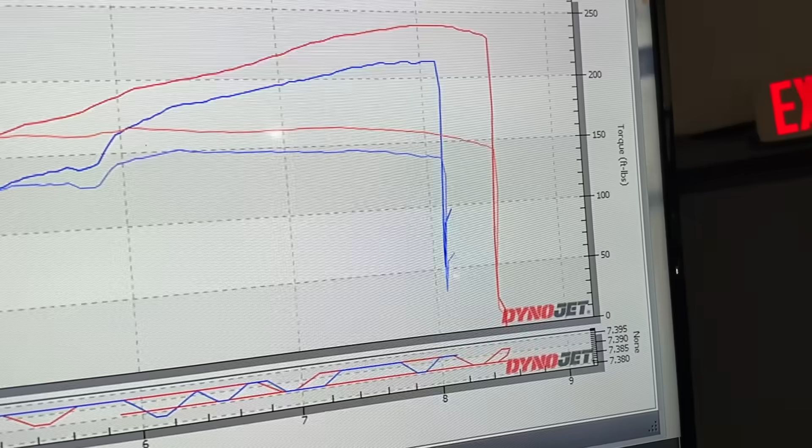My car has the NA package. I'm going to call it an OEM Plus enhancement package. This S2000 is a 2004. It's 100% stock except wheels and suspension. We're going to show you a full before and after and details of what this NA package is all about.

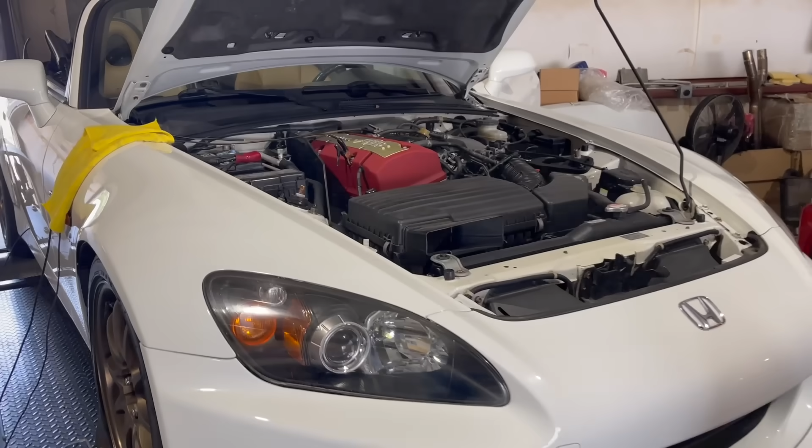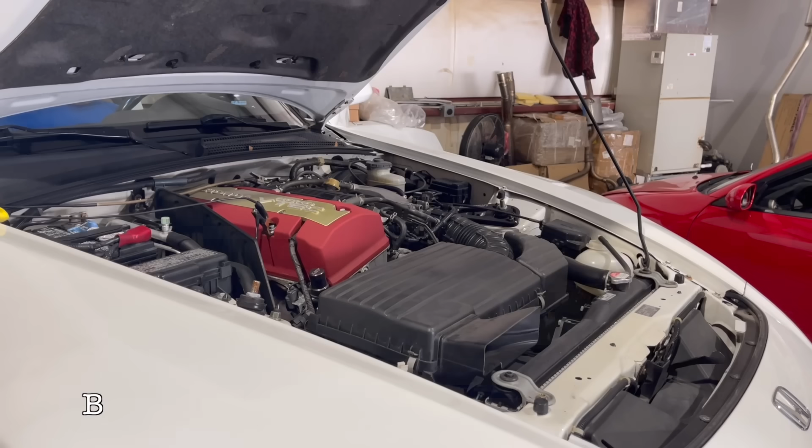All right, we have Jeff's car on the dyno. It's idling, trying to make sure it's up to operating temperature. Alright, so the car is pretty darn consistent. It's 211, basically 150 on every run.

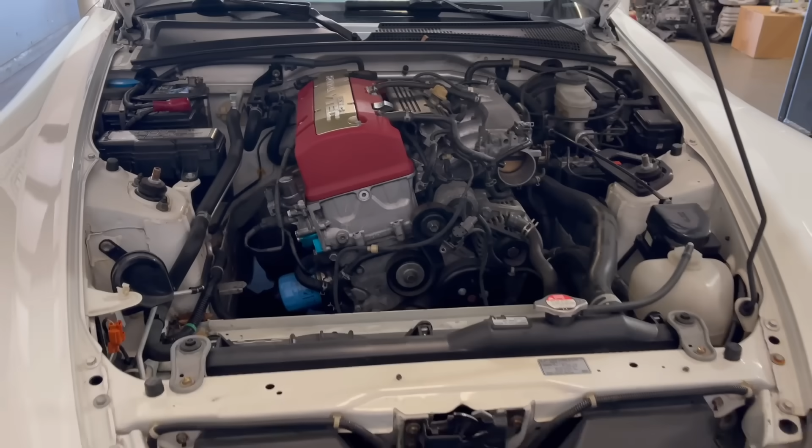Got the car in the shop. I've done a little bit of work off camera here, which is just removing the airbox. I've got the bolts off of the factory header and the heat shields removed, so I'll be ready to go up in the air and take that out. I got the airbox out, so we're going to do a modification to the airbox.

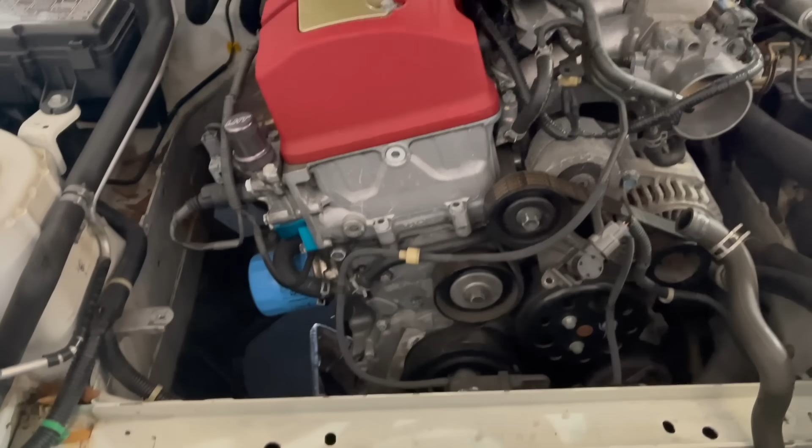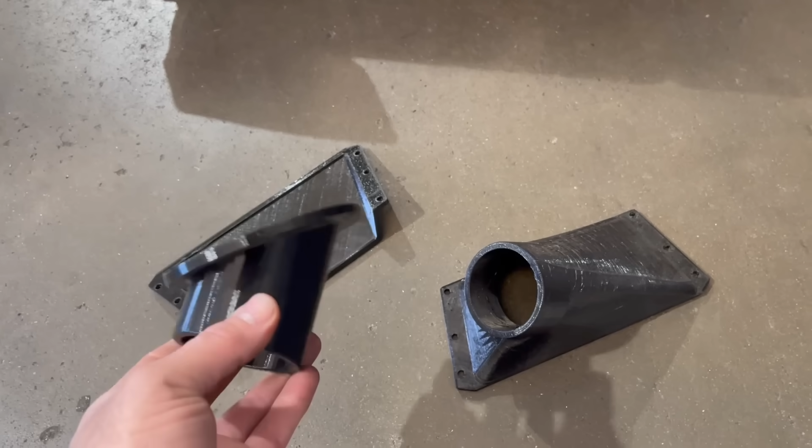And you know, we've done the airbox mod in the past where we just take the divider out, put a K&N filter in it. We're going to take the airbox, we're going to add a little something extra to it now. So here are the parts we're going to add to the airbox. This here is a port that's going to bring air into the airbox. It has an angle on it to point it straight down because the front of the airbox has an angle to it. This is the top half of a scoop that's going to basically connect this to there, and then this goes under the car. Now we put it on this side over here to keep water and debris from getting directly on the filter.

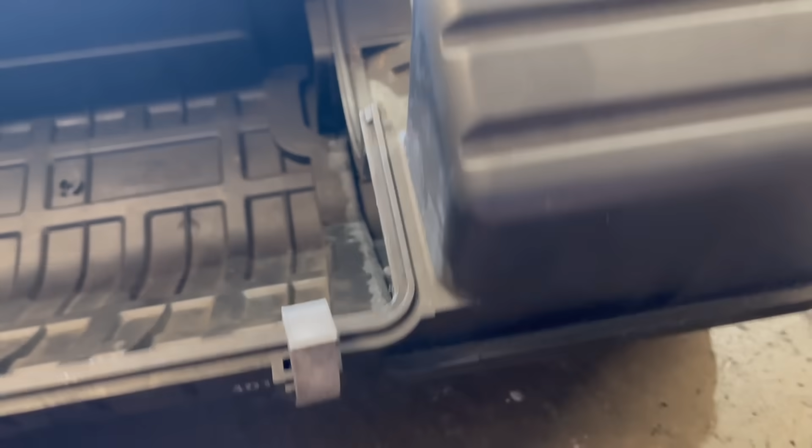All right, so that airbox is now all opened up. I've got that area opened up as well for the scoop. And then I used some nut certs in the plastic there. And we'll Loctite the bolts. They don't need to be tight, they just need to hold it in place. So that will hold it very sufficiently. But that whole area is opened up, so now when you bolt that on there, it's gonna blow air into here.

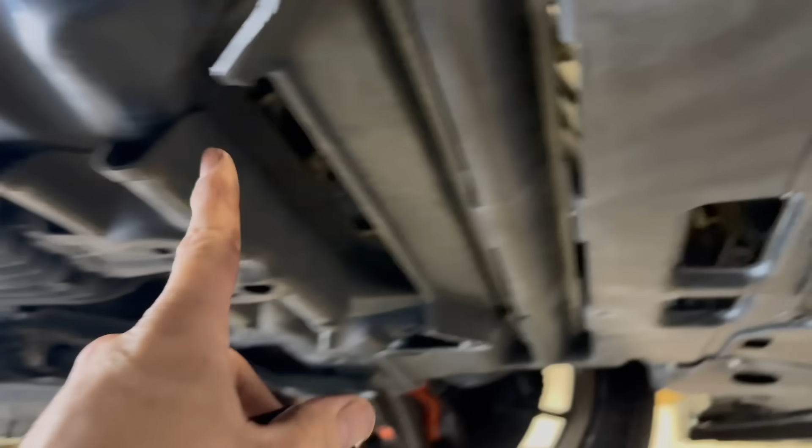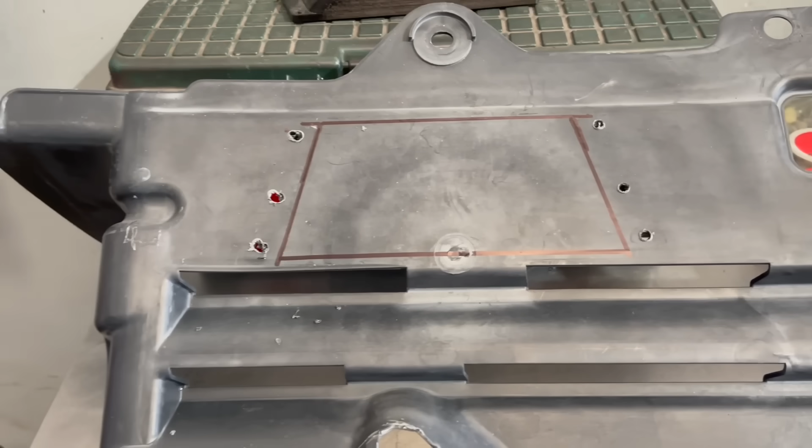All right, with the car on the lift, you have this plastic piece here. Basically the radiator is here and the subframe is back here. I'm a little too close. So the piece of plastic goes in between the two. You get this large flat area here. We've got our scoop, and we're gonna mark out where it goes about in this area. And we got that. So we gotta take that with the marker and cut it out.

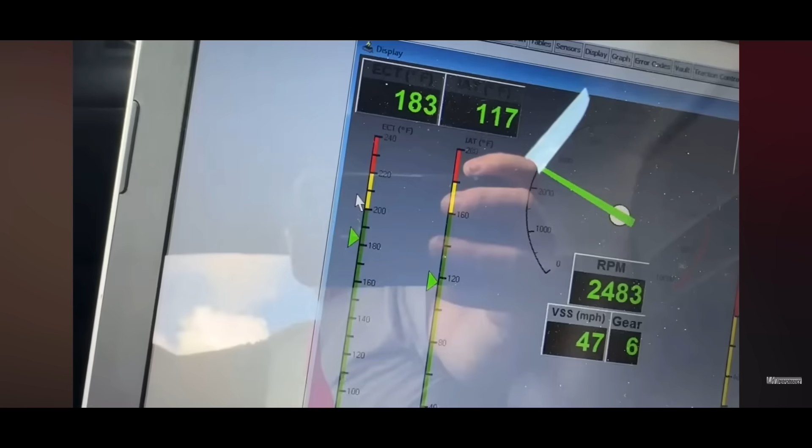I've tested this intake on my car for a little over a year now, and it's real world testing. I've seen intake temps of 117. I've done 2 back-to-back runs on this road just in case there is a headwind and it's changing. It's dropping already. It's at 111. Right now 104 is what we're looking at. This is at the end of this first run. I'm going to turn around and go the opposite way now.

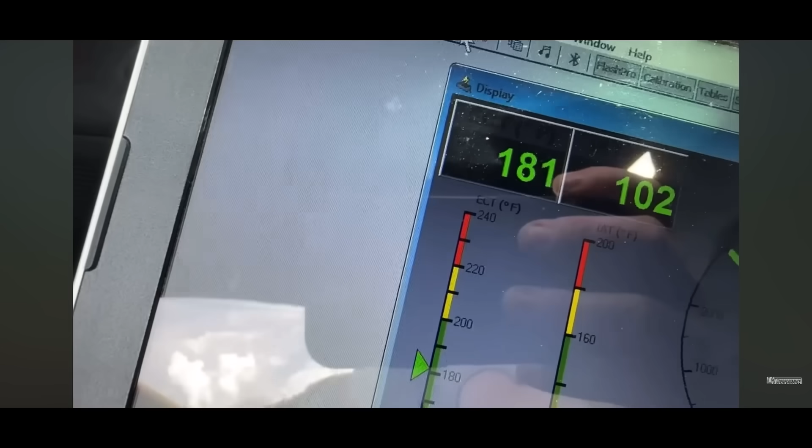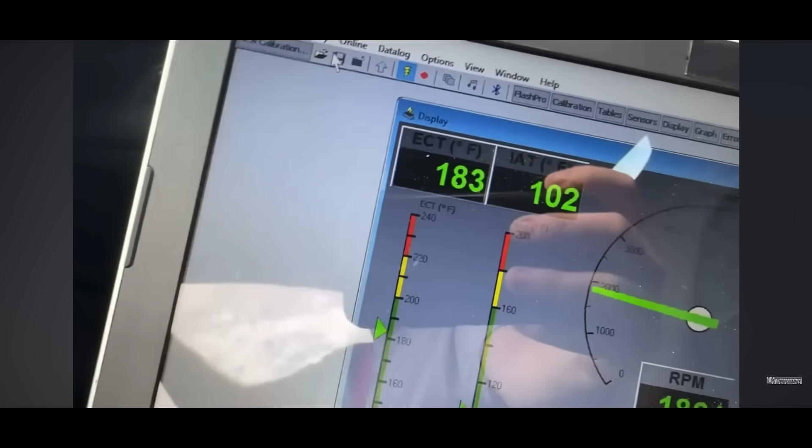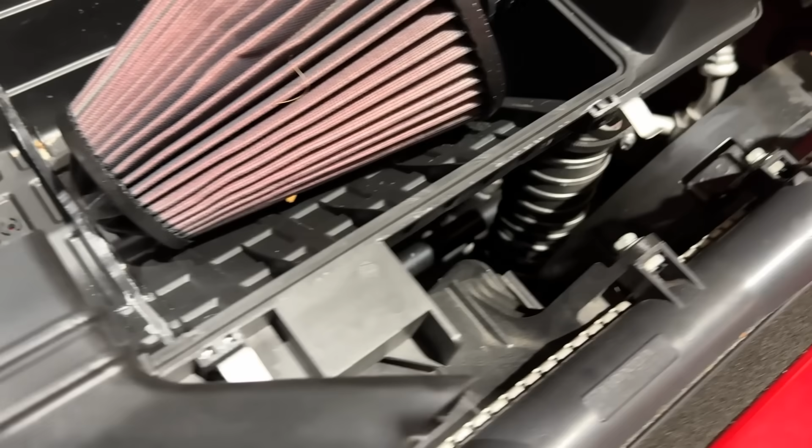We get a lot of rain in Florida. I always recommend don't drive in standing water, but of course you can't help the monsoon rains that we get here. I've been testing it, and I periodically open the box just to see what it is drawing in there. And so far, we haven't had any moisture at all. The only thing we get in there is leaves and bugs and debris off the road. But so far, it's been testing out great.

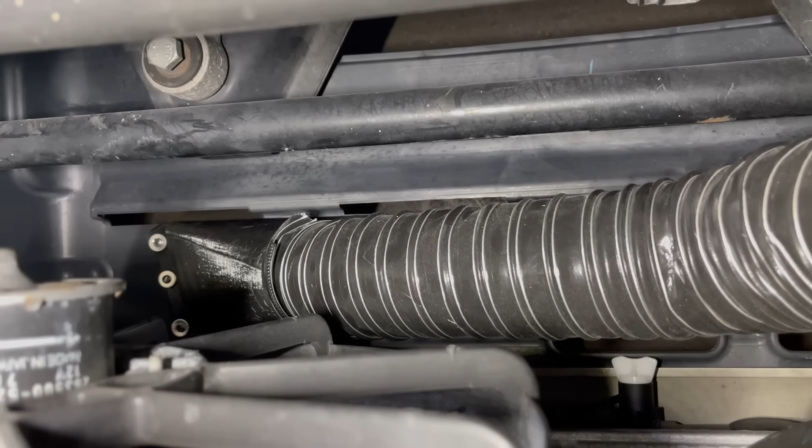There's the hole we cut in the plastic. Now, if you don't have them and you cut little plastic like this, go to Harbor Freight and get these scissors. They're only $9, and they make pretty short work of any of these thin plastics, and they do a pretty good job at cutting. They leave a pretty decent edge. It doesn't look perfect, but it's a pretty good edge. The outlet of that coming up here to there. So everything's back in, hooked up, just got to put the lid on.

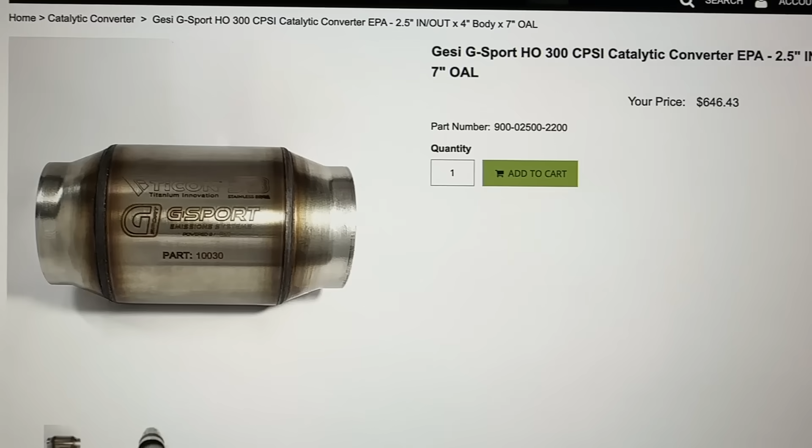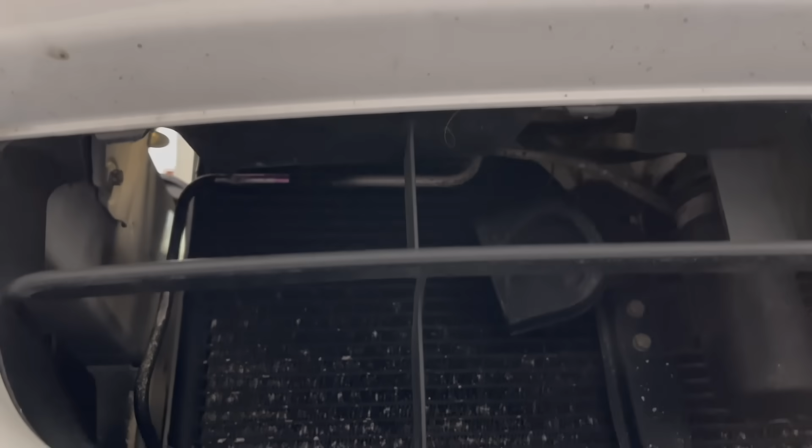We're building a header to really promote mid-range power, and of course it runs a catalytic converter. We're trying to keep the car clean as well as not produce any smells. We want the car to be OEM plus. OEM cars don't smell like rotten eggs and oil. We have an intake system that's gonna help keep the intake temps cool and prevent heat soak. We'll talk about the package as we go through.

Let's just recap that comparison. All right, third gear. Are you ready? All right, go.

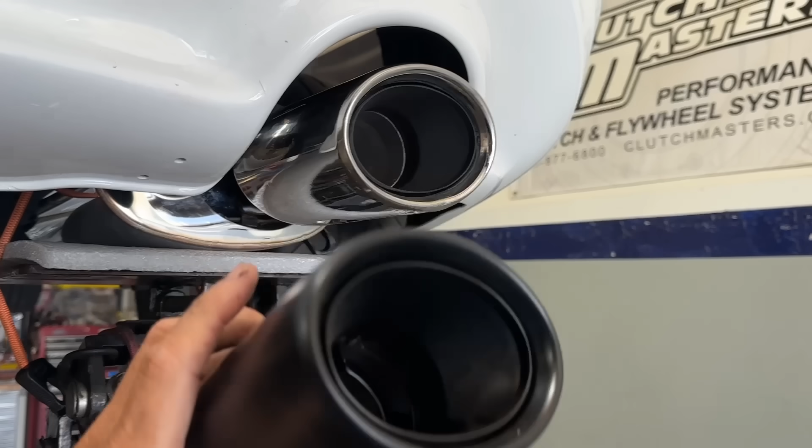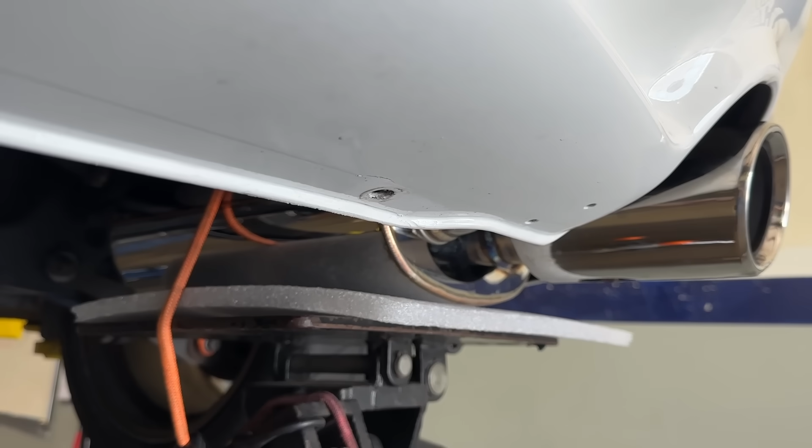This would look nice. The problem is when you see this is really offset. It's going to look odd over here. Jeff, kind of give us free play and just build it the way you would build it. I'm thinking when we're done, we're going to send those out and have those ceramic coated. They will be satin. In fact, they'll look very much like this.

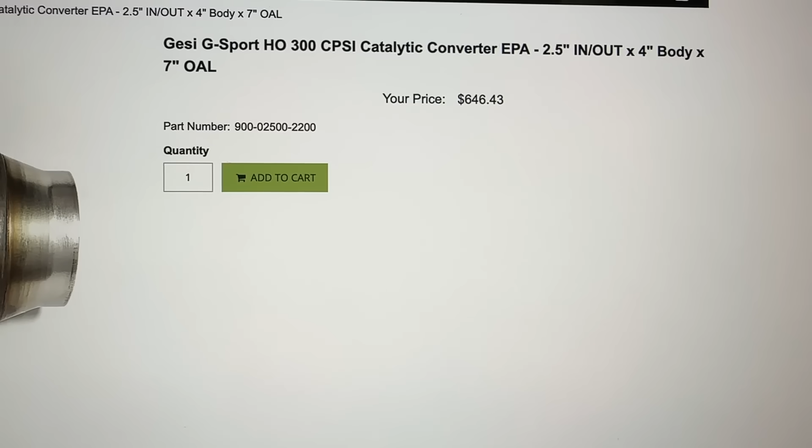Alright, here's how we're starting out the exhaust on the white NA package. We have a G-Sport Emission Systems catalytic converter. This is a high flow catalytic converter. We've tested this one multiple times. This has plenty of flow to do what we're doing. And we have a flex because we're using a V-band on the end of the header.

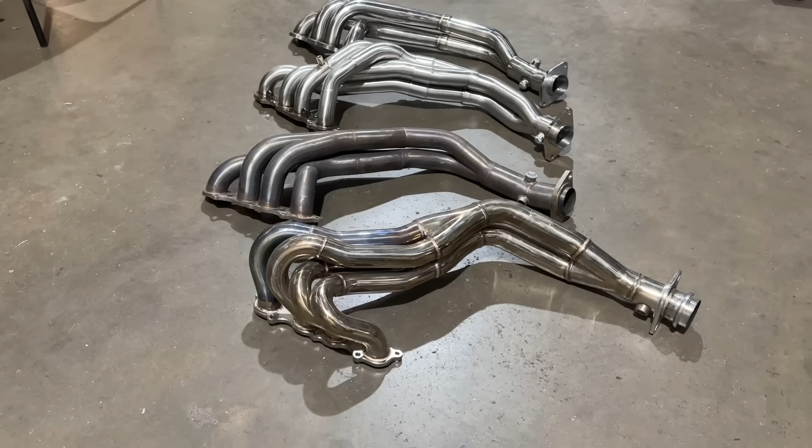So there's the cut down muffler. That's as big as we can make it in the space that we have. And the pipe going to the flex, catalytic converter. We did learn so much by just testing so many headers on the market and playing with headers over the years. It's surprising how much difference the tube diameter, the pairing, and the length change the overall power band.

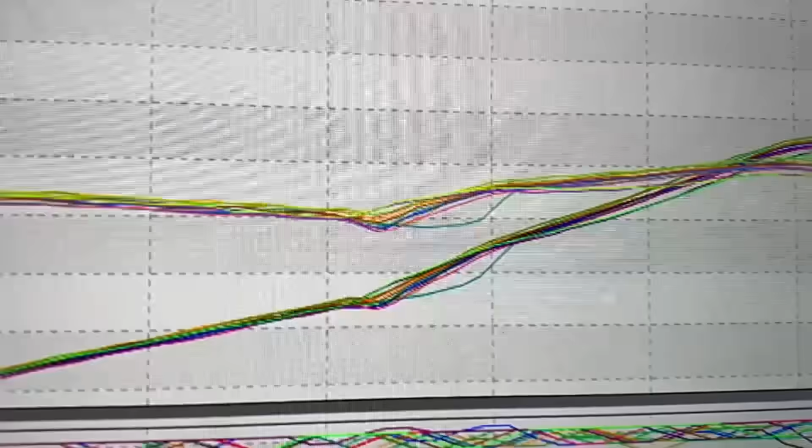So one thing we have noticed is most of the aftermarket headers are all about the same length. The starting point and end point is the same because they want to make it a direct bolt-on. So there's very little you can gain staying within these sizes. In fact, between all these headers, there was only about 10 horsepower between the best and the worst header.

This is the VTEC in the exact same spot, by the way. The blue and the red, these two, exact same spot. That's just showing you how the engine is using that header design and diameter to make power. I mean, that's a big increase in the middle.

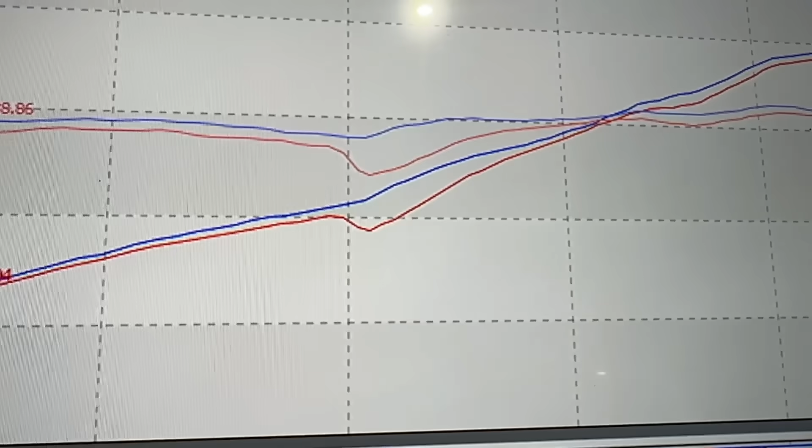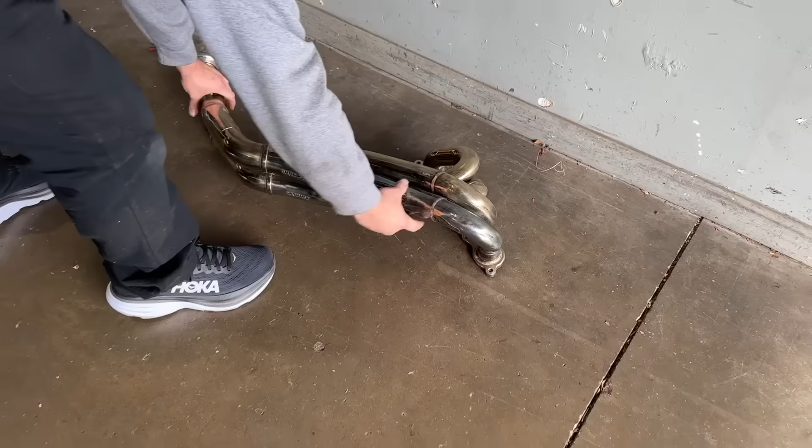To understand what these headers do, you'd literally have to test them all and then play around by cutting them, changing the length, changing the pairing, changing the diameter. It goes back to good old experimenting without really expensive equipment. Hundreds of hours of just cutting and changing is often the way it's done.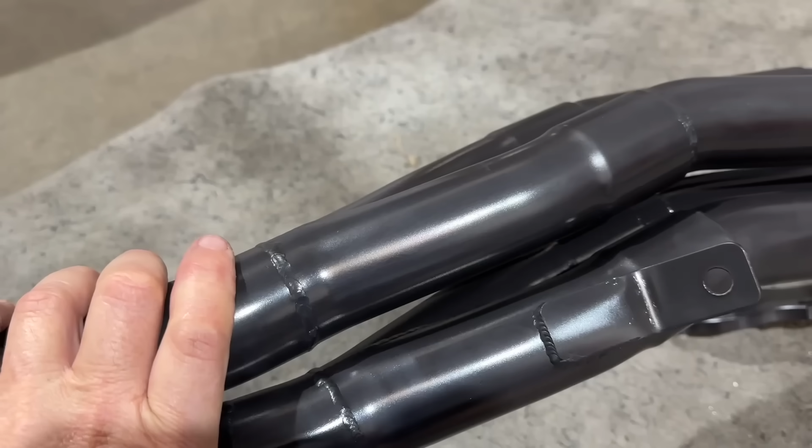We used our car, which was pretty much a stock S2000. It wasn't a real high horsepower car, so the results were easy to replicate. It's something that's pretty consistent, making the same power, so we could see what the header did.

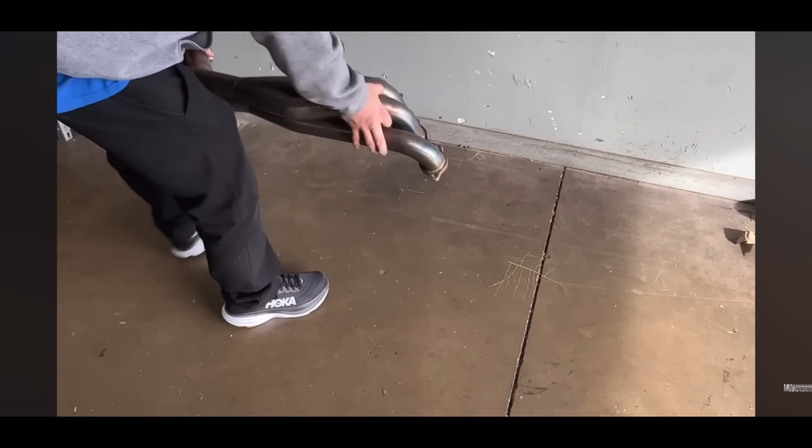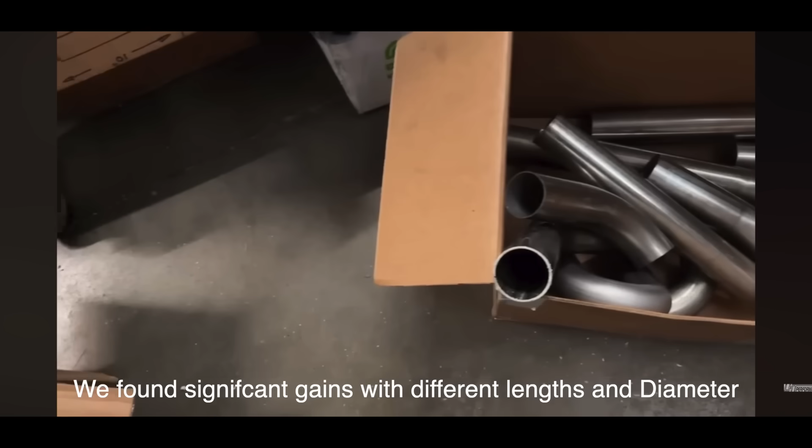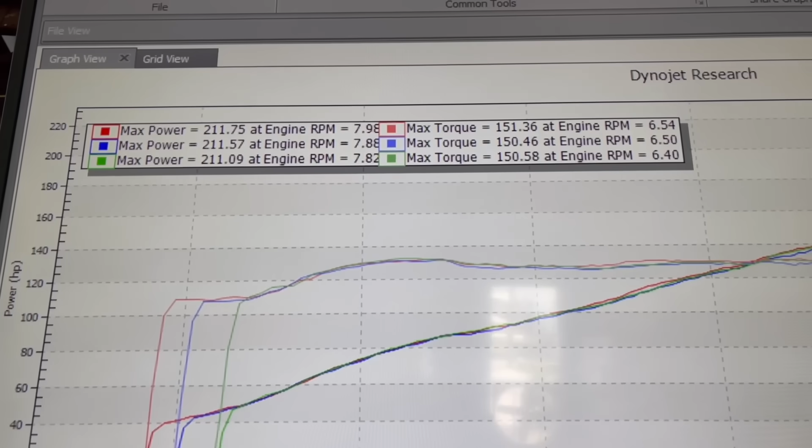So the amazing thing is these cars are within about 1 horsepower of each other stock. Mine is a 2008 with 22,000 miles. His is an '05 with about 120. But even the shape of the dyno run looks the same.

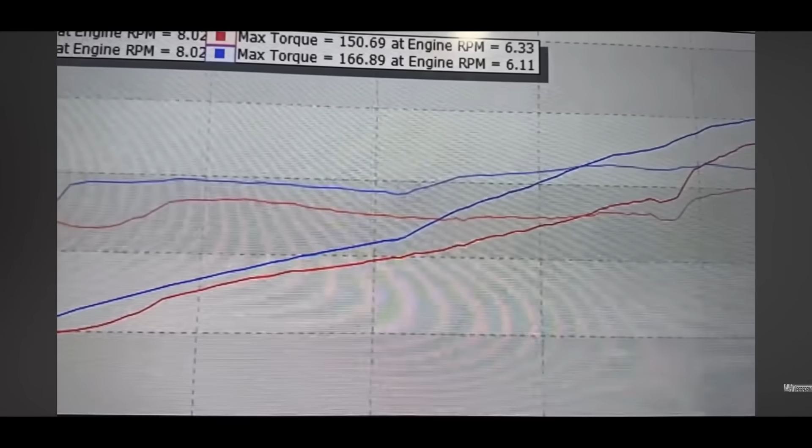In the separate header test, I want to kind of show you more of the nerdy stuff behind the scenes, but I'll show you here in a minute just some of the dyno runs that we've had. This is all header tuning. Now, changing the VTEC point will change some of this mid area here, but also by the header length, we can put the VTEC in a different spot. Some of these, when we put the VTEC too early, it would actually lose power.

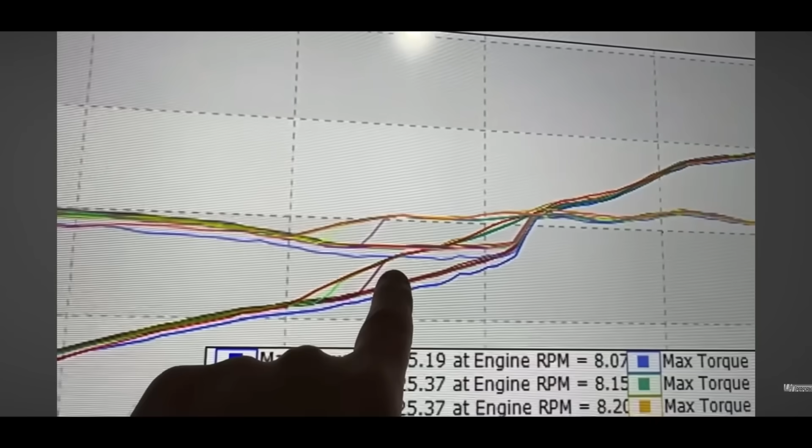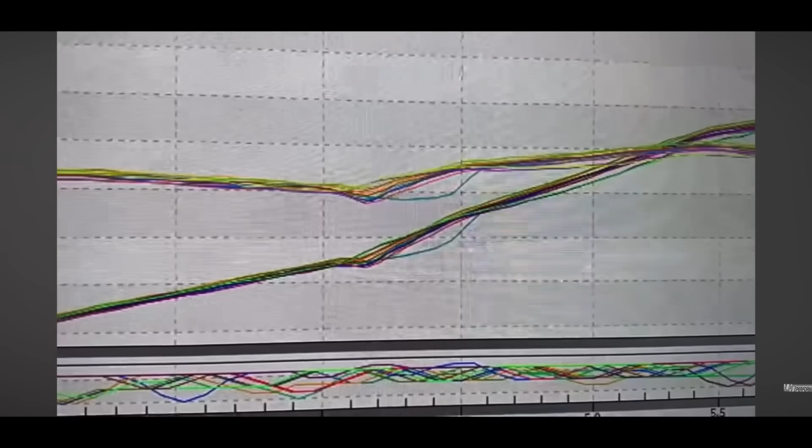There's some more here I'm going to show you, but this is essentially the area that it made the most power. There's another full file, all on the same header. This is all changing the length of the header in different spots. This is zoomed in on this midsection, obviously. Playing with this is changing VTEC point. You always put your VTEC point, the lowest point, the highest point, and see where the crossover is. But then as we would play with the headers, this area here would change dramatically.

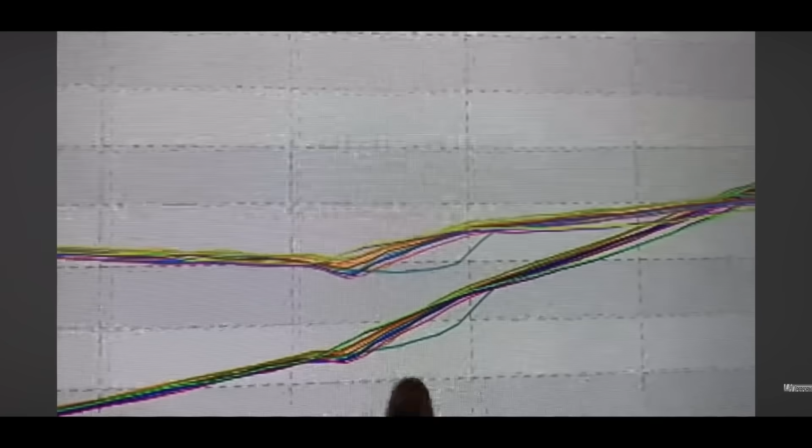Let me show you the best to the worst on this one. This, again, is the same exact header, just playing with tuning on it. Not a whole lot up top, a little bit of gains. But so much through here, we could play with the VTEC point. We put the VTEC too early, it would drop and fall on its face.

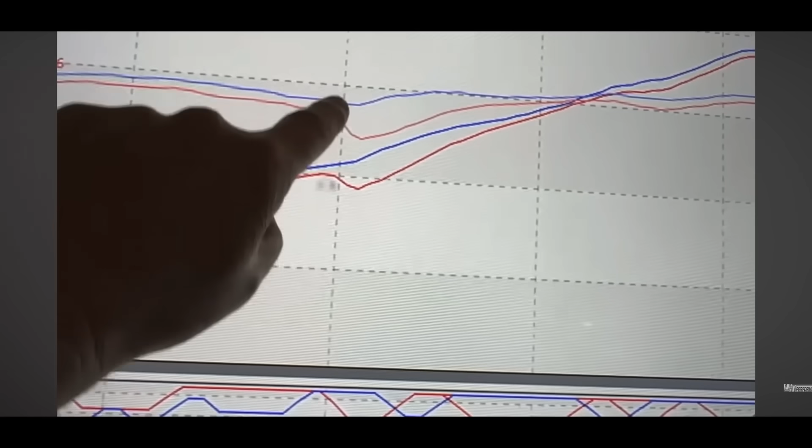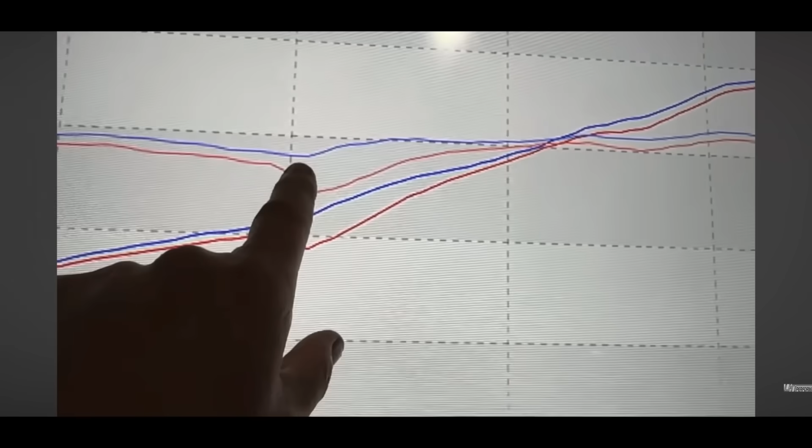This is the VTEC in the exact same spot, by the way. The blue and the red, these two, exact same spot. That's just showing you how the engine is using that header design and diameter to make power. To give you an idea, this one did the best mid-range and torque all the way through, but it would do 235 at the top and it would peter out.

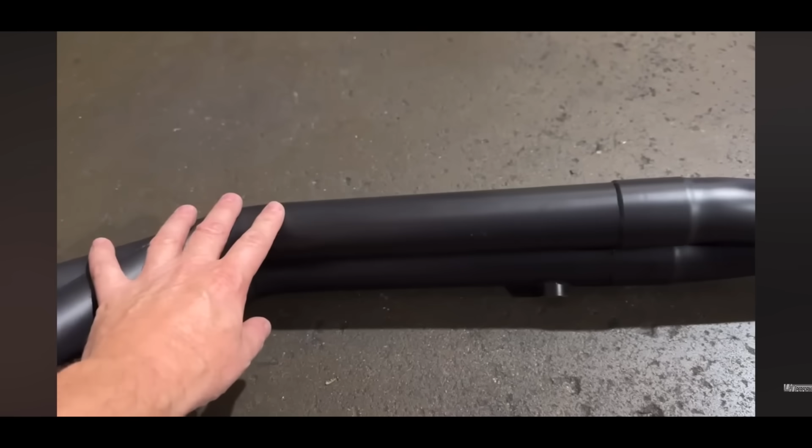We changed this design to the one we have now, which we made these 2 inches longer. We basically took this merge a little bit closer, took this distance out here, and about 4 inches shorter here for this merge. This had a lot of effect all the way through the mid-range, like I mentioned earlier. This is the bottom section I'm talking about.

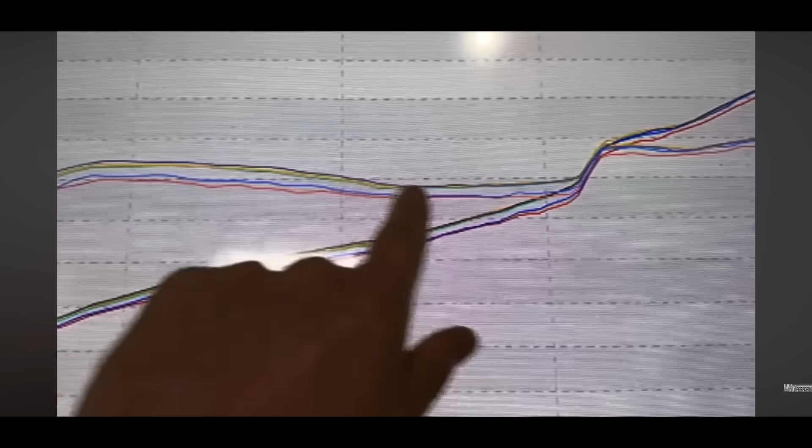You can see where it picked up pretty much everywhere. It mimicked it in every single spot until it came to the VTEC changeover. Now this, the lower section here, did better with a higher VTEC. This is at 52. If we dropped it here where it looks like you're starting to lose power, often you could put VTEC early and pick that power back up.

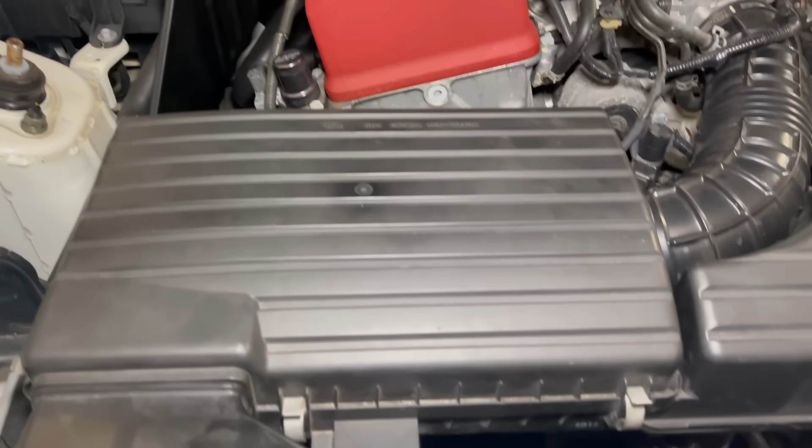So it's all finished. The tuned header, the airbox with the scoop, and of course the custom exhaust. Let's get this thing on the dyno. Let's show you the results, and then we'll show you the before and after, show you exactly how much this car is making. Then we'll talk to Jeff at the end and see what he thinks about this package.

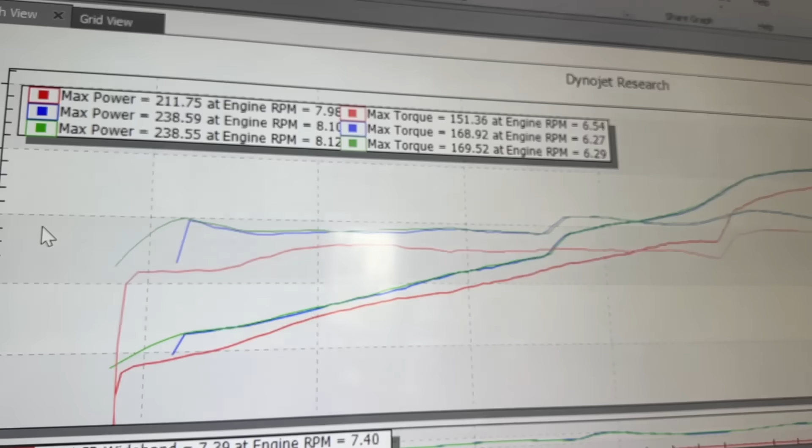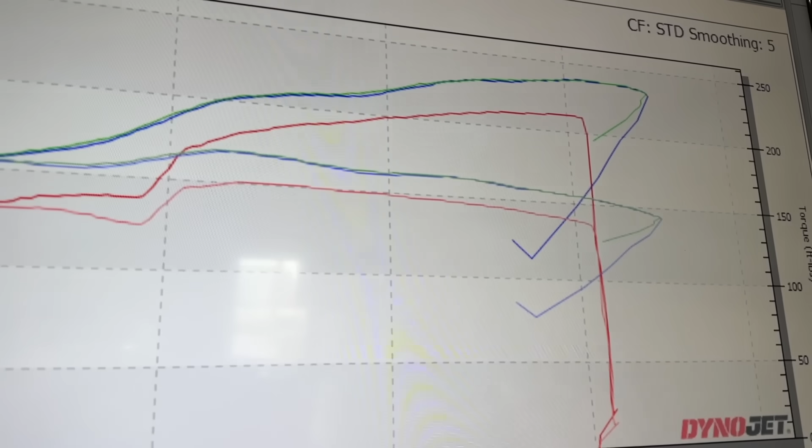169, 168, that is pretty much it. It's maxed out, but that's quite a bit from where we started. That's 27 horsepower. That is a good gain, especially today, because it is hot today. But there we go. Much better, more power all the way. And it has this distinctive little hump right here, which is the same as what mine had. I think that is in the header too.

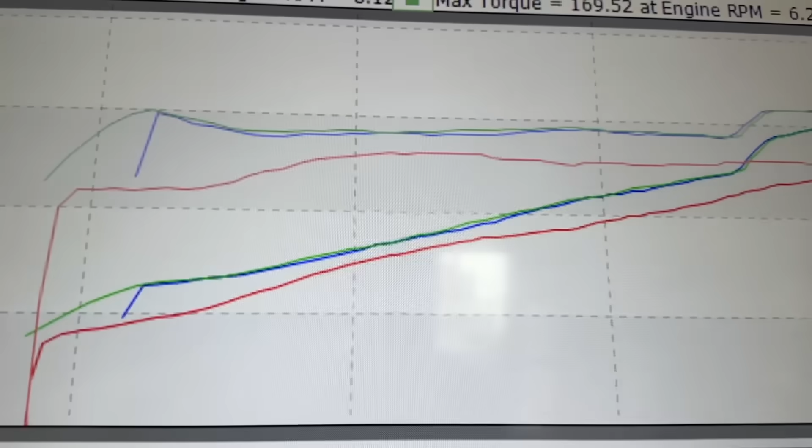So it's a year later, and I just took my car to the Dragon. We did a 2,000-mile road trip, mainly country roads once we got up in the Tennessee area. We just attended the Classic Hondas on the Dragon 10. But highway, this package, I was getting around 33. Obviously, plenty of power for the mountains.

I'm a big turbo guy. I like 400 horsepower in these cars, but once you get up into the twisty roads, it's more power than you need. But I wanted a package for the old motor guys, for the guys that don't want to take the engines apart and do any kind of internals. Just a proper package that's tuned to work with the car.

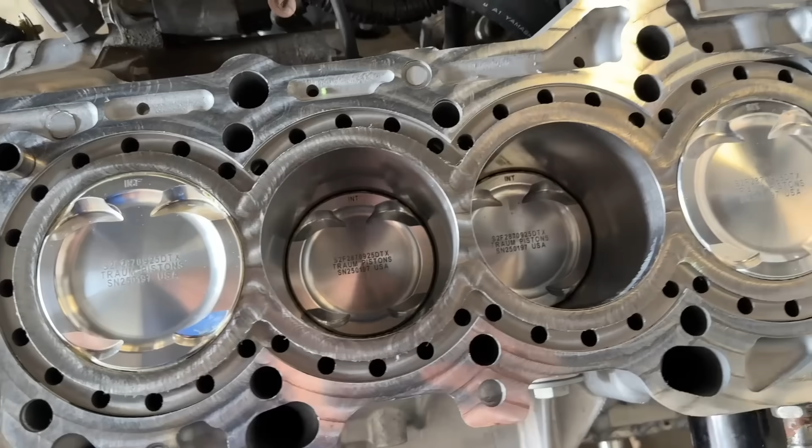So fast forward, I do have plans to build a 2.4 high compression motor for my car. When I say high compression, around 11.7, 11.8, so it's friendly on pump gas. I want it to be a normal OEM Plus package. Just like I've always said, you go too much any direction, you ruin the car. OEM Plus is essentially the factory system turned up a few clicks.

Well, I think this car with, say, 260, 270 to the wheels with a normal sounding exhaust, nothing obnoxious, and just tons and tons of mid-range power, is going to make this car absolutely fantastic. So that's going to be coming up. I'll essentially use what we've learned from this package and transfer it over to a 2.4 bottom end.

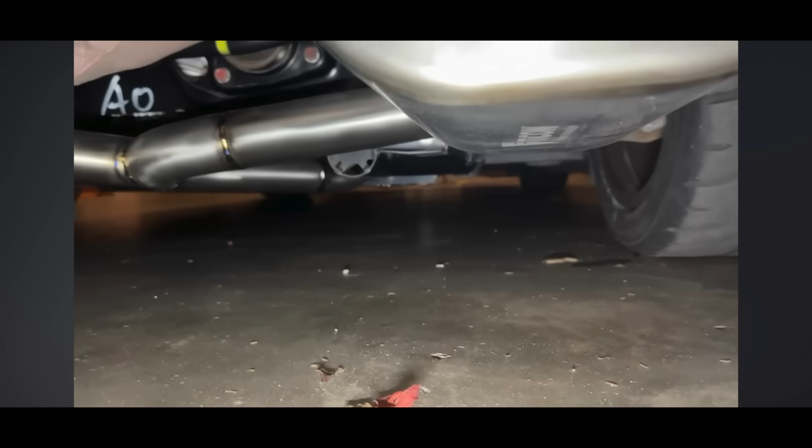Now, when we say 2.4 bottom end, it is an S2000 engine, just with a 2.4 crank, sleeved, balanced, stronger rods, stronger pistons. So that way, if somebody wants to put a little bit more on top of it, maybe a 50 to a 75 shot of nitrous, just for that really hit-home-hard power, it's going to be happy with that. And again, just for more durability purposes.

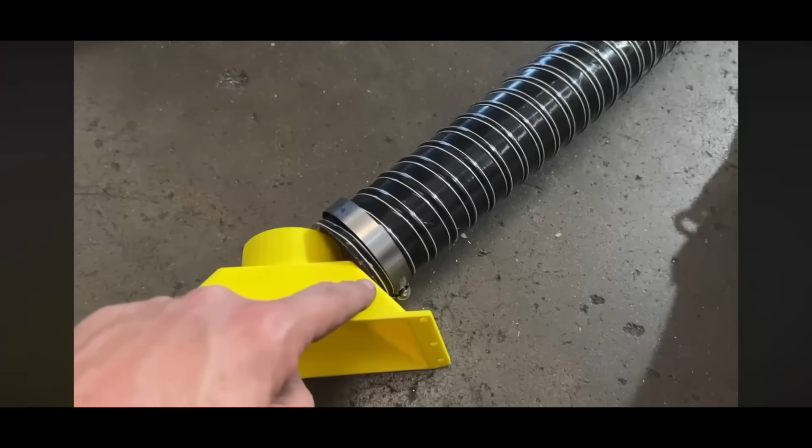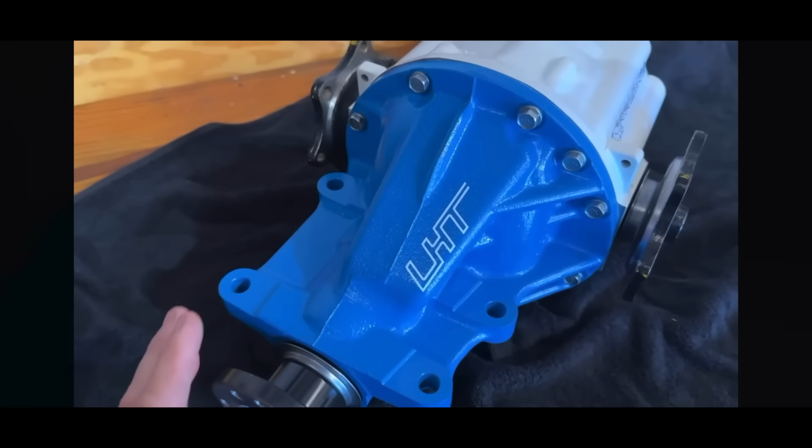So thanks for watching. Hopefully you got some ideas from this. This isn't a package we're going to sell online. It's only a package we'll offer as a complete system, because it's the only way it works together. The different differential gearing is optional. It doesn't change the actual horsepower, but the gear ratio makes the car accelerate much faster.

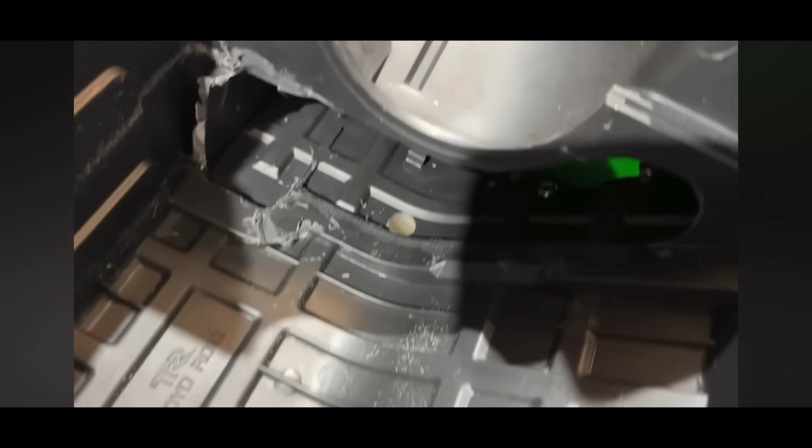And like I've shown, it's completely livable on the highway. If you're cruising 75-ish, completely fine. The car is quite happy singing along at about 4,500 RPMs, and you're still going to get the good gas mileage. So that is optional. Like I said, it's more for feel. It rips through the RPMs faster. It doesn't dyno any more. It's just a gear ratio change.